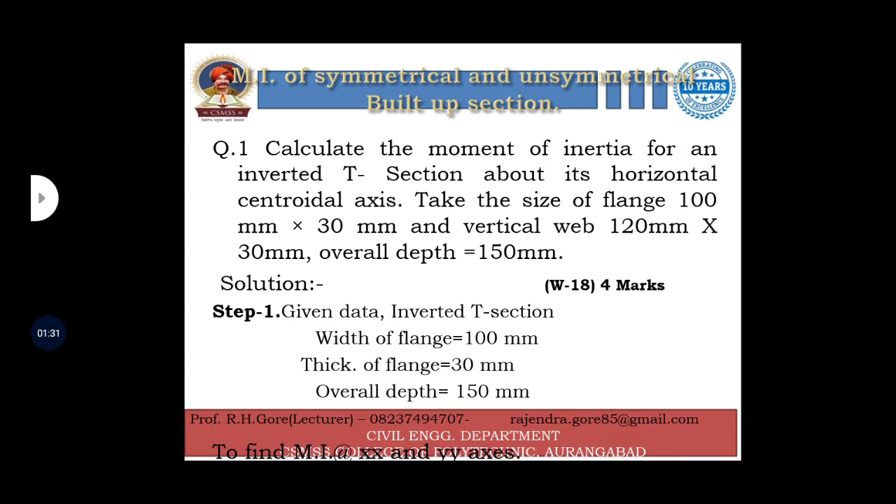So dimensions are given: width of flange 100 mm, thickness of flange 30 mm, and overall depth is 150 mm. Width of web is 30 mm and depth of web is 120 mm. Overall depth is 150 mm, so 150 minus thickness of flange 30 gives depth of web as 120 mm.

To find the moment of inertia about the horizontal centroidal axis.

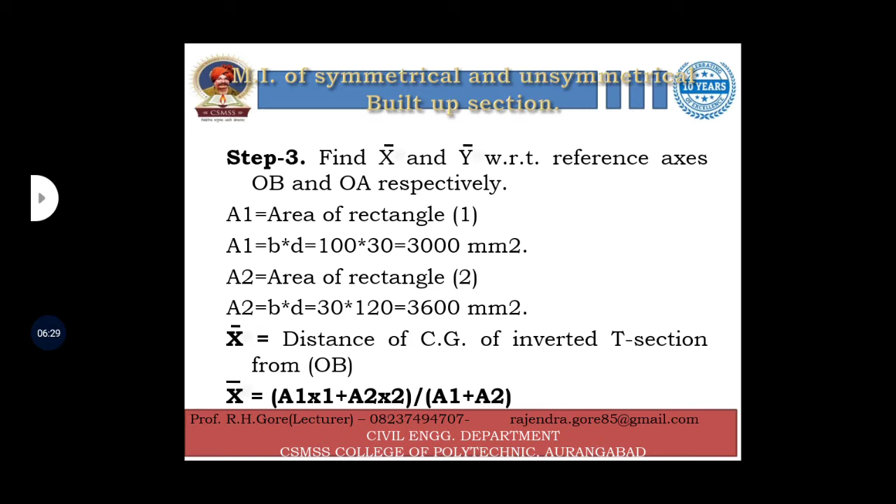The formula is a1x1 plus a2x2 upon a1 plus a2, or we can find directly since the given section is symmetrical about the y axis, so x bar is total width by 2. So you can use either step.

So x1 is the distance of the centroid of rectangle 1 from the OB axis. The CG of rectangle 1 is denoted by g1, and its distance from OB is total width by 2. Total width of rectangle 1 is 100, so 100 by 2 is 50 mm. Y1 is the distance of the CG of rectangle 1 from the OA axis.

So total depth of rectangle 1 is 30 mm. So y1 is total depth by 2 of rectangle 1. So 30 by 2 is 15 mm.

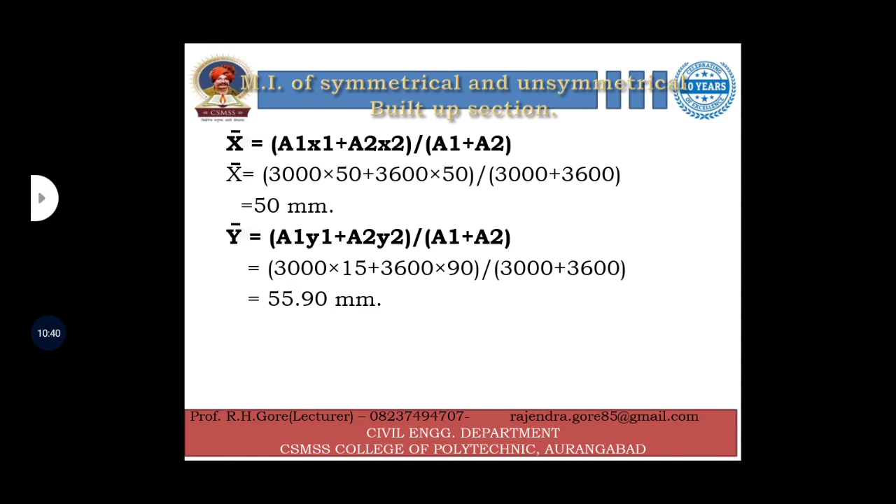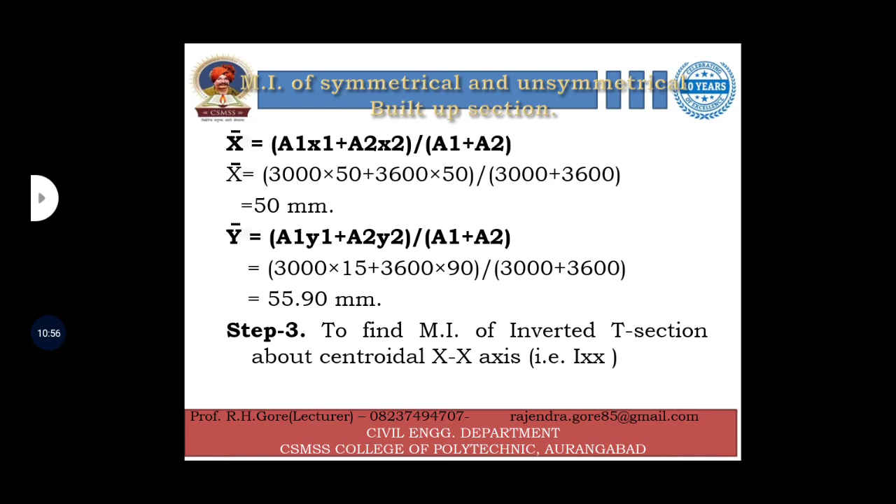XX axis and YY axis is passing through G, means centroid of the T section, and x1 axis is passing through CG of rectangle 1, and x2 axis is passing through CG of rectangle 2.

We have to find out the moment of inertia of these two rectangles about the XX axis of the inverted T section. So by using the parallel axis theorem we can find this moment of inertia of these two rectangles about the XX axis. So reference axis is XX axis, and CG axis is the CG of rectangle 1 axis.

CG of rectangle 2 axis is x2 x2 axis. So we know the parallel axis theorem.

IAB is equal to IG plus A1 H1 square. So IAB is moment of inertia about the reference axis. In this problem our reference axis is XX, and the centroidal axis is x1 x1 and x2 x2 for rectangle 1 and rectangle 2 respectively. A1 is area of rectangle 1 and 2, and h is the distance between the reference axis and centroidal axis.

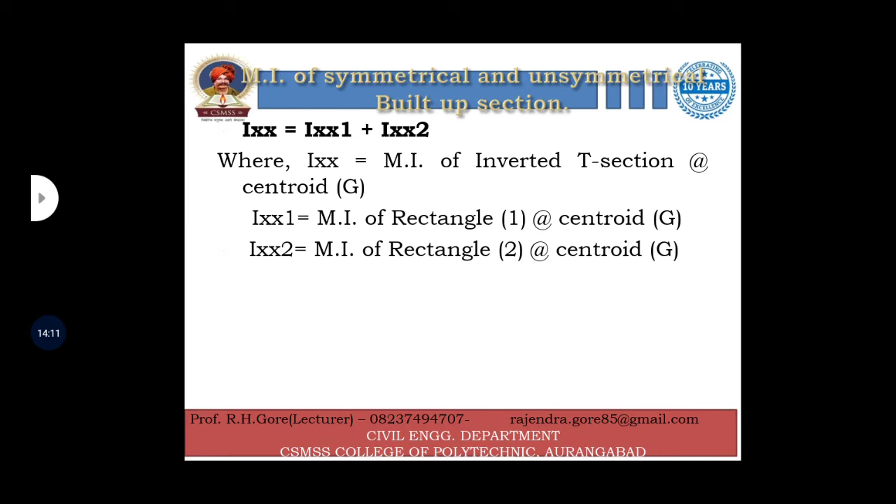By using parallel axis theorem, IXX1, the moment of inertia of rectangle 1, is equal to IG1 plus A1H1 square. IG1 is the moment of inertia of rectangle 1 about its own centroid, meaning about the x1 axis.

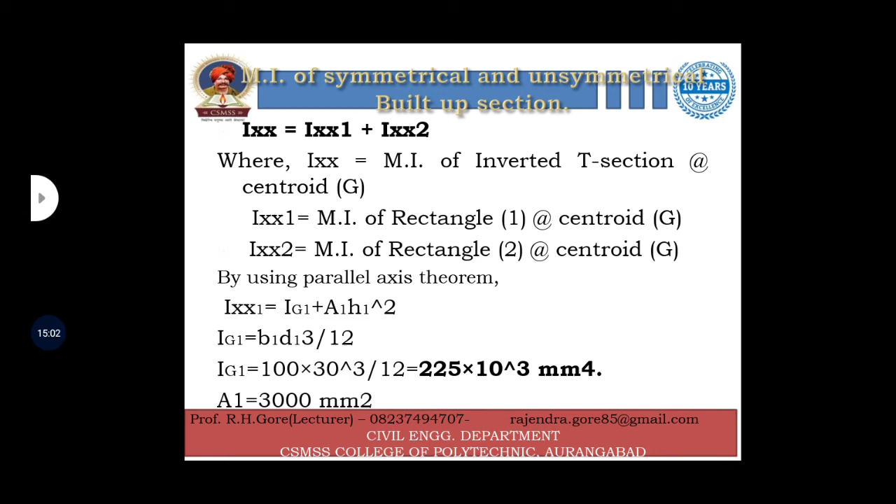A1 is the area of rectangle 1 and H1 is the distance between the xx axis and x1 axis. So Ig1 is equal to B1 D1 cube by 12. B is 100, D is 30 cube by 12. So moment of inertia of rectangle 1 about its centroidal axis is 225 into 10 power 3 mm power 4. Area is 3000 mm square.

H1 is the distance between x1 and x axis, as seen in the figure. H1 is y bar minus y1, so 40.9. So moment of inertia of rectangle 1 about centroid of the inverted T section is 5.243 into 10 power 6 mm power 4.

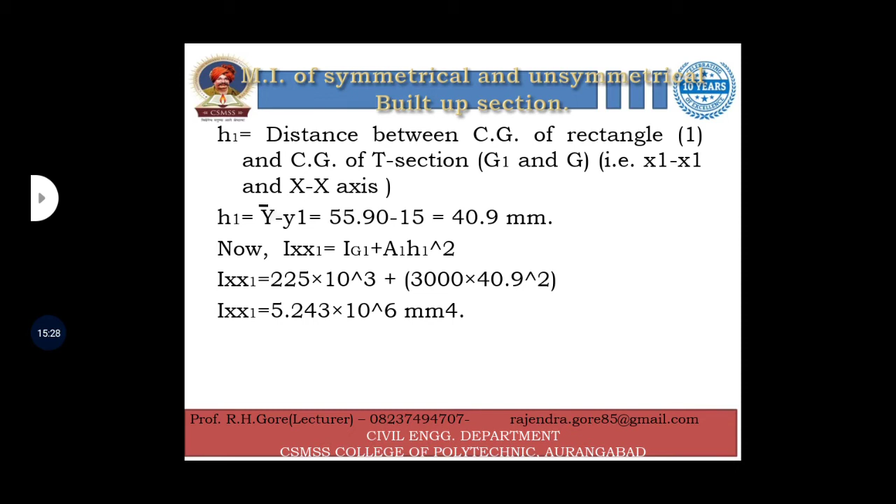Now the moment of inertia of rectangle 2 about CG of the inverted T section is Ig2 plus A2H2 square. Ig2 is B2 into D2 cube by 12, so 30 into 120 cube by 12 is 4.32 into 10 power 6 mm power 4, the moment of inertia of rectangle 2 about its own centroid. A2 is the area of rectangle 2, 3600 mm square.

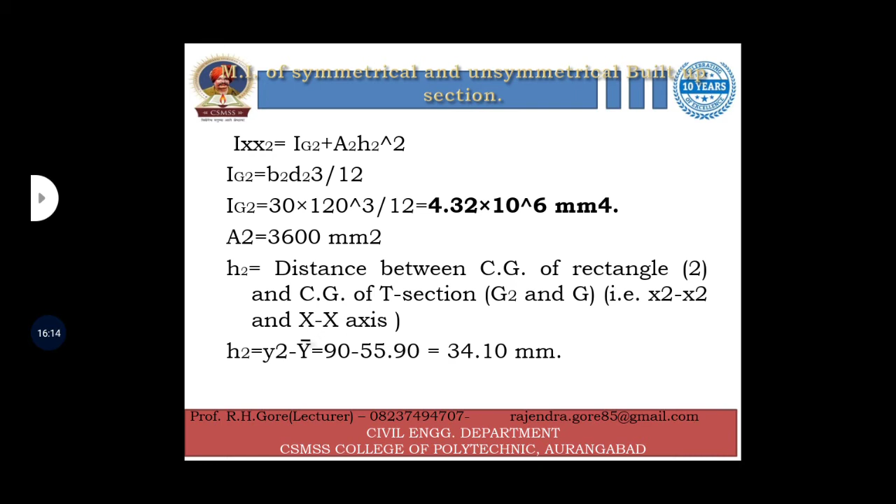H2 is the distance between x2 axis and x axis. H2 is y2 minus y bar, so 34.10 mm. Now the moment of inertia of rectangle 2 about CG of the inverted T-section is 8.506 into 10 power 6 mm power 4.

So total moment of inertia about CG of the T-section is Ixx1 plus Ixx2. Putting in the values of Ixx1 and Ixx2 and summing them, we get moment of inertia of the inverted T-section about the horizontal centroidal axis as 13.749 into 10 power 6 mm power 4.

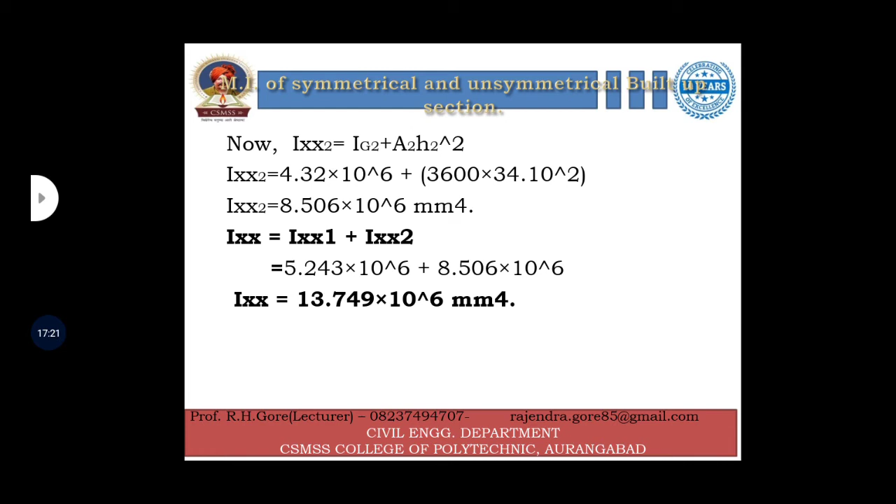Step number 4: to find the moment of inertia of the inverted T-section about the centroidal YY axis. So in the same way, Iyy is equal to Iyy1 plus Iyy2. Iyy is the moment of inertia of the inverted T-section about centroid G. Iyy1 is the moment of inertia of rectangle 1 about the centroidal axis of the inverted T-section, and similarly Iyy2 is the moment of inertia of rectangle 2 about the centroidal axis of the inverted T-section.

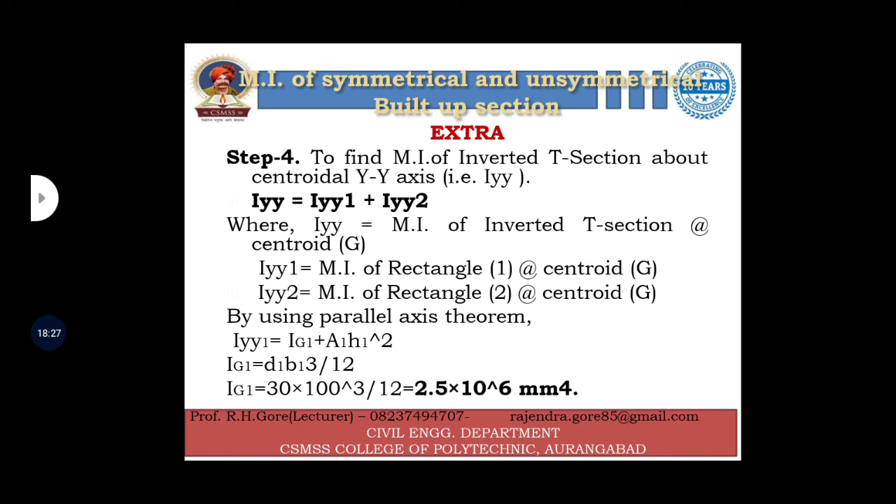By using the parallel axis theorem, Iyy1 is equal to Ig1 plus A1H1 square. So Ig1 is D1 B1 cube by 12, D is 30, B is 100, giving 2.5 into 10 power 6 as the moment of inertia of rectangle 1 about its centroidal axis. A1 is the area of rectangle 1, H1 is the distance between the CG of rectangle 1 and the CG of the T-section.

So in the figure, we have already seen that the vertical axis of rectangle 1 and the vertical axis of the inverted T-section coincide, meaning the distance between these two axes is 0. We have already found x1 and x bar, and these two values are equal. x bar is 50 and x1 is also 50. So H1 is 50 minus 50, which is 0, because the inverted T-section is symmetric about the y axis.

We can directly write that the given T-section is symmetrical about the y axis, so the moment of inertia about the centroid of rectangle 1 and the moment of inertia about any reference axis are equal. So moment of inertia of rectangle 1 about the YY axis of the inverted T section is 2.5 into 10 power 6 mm power 4.

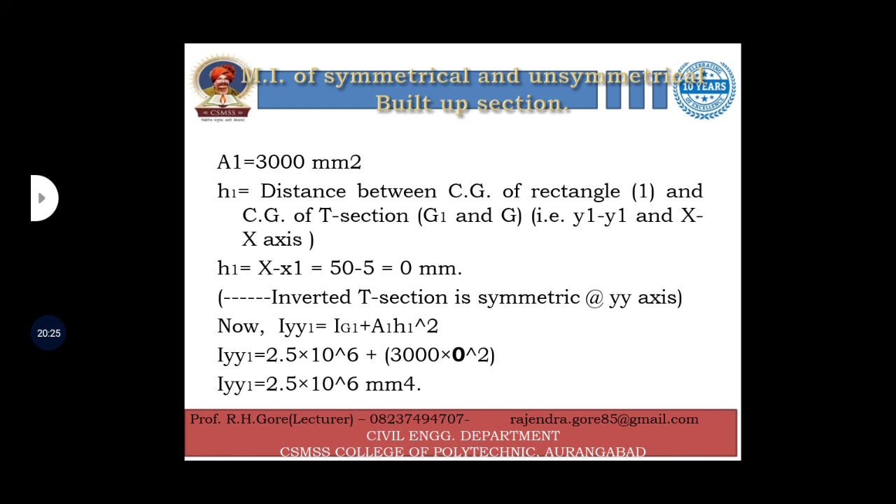Or we can find it by putting this value into the equation. So Iyy1 is 2.5 into 10 power 6 plus area 3000 into H which is 0. After the plus sign, the term becomes 0 because it's multiplied by 0. So 2.5 into 10 power 6 is the moment of inertia of rectangle 1.

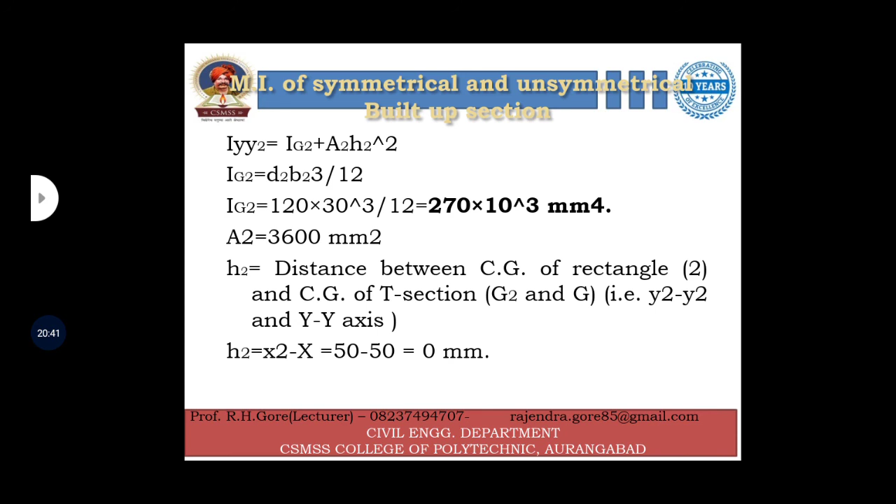Then for rectangle 2, Iyy2 is Ig2 plus A2H2 square. In this case also H2 is 0. So the moment of inertia of rectangle 2 about the centroidal axis is 270 into 10 power 3 mm power 4.

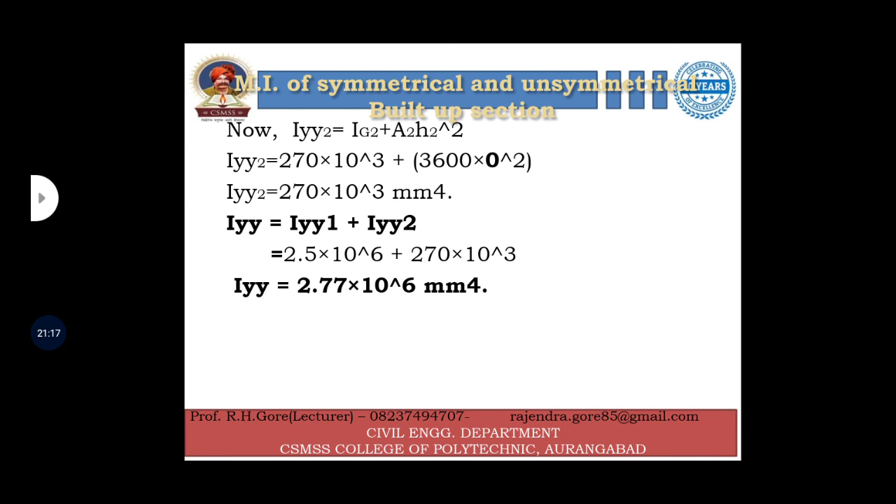So total moment of inertia about the vertical axis of the inverted T-section is Iyy1 plus Iyy2, which is 2.77 into 10 power 6 mm power 4, the moment of inertia of the inverted T-section about the vertical centroidal axis. So in this way we can find the moment of inertia of any built-up section about the CG or any reference axis.

So this covers the numericals on inverted T sections or built-up sections. In the next lecture we will discuss the numericals on unequal I sections. Okay, thank you.